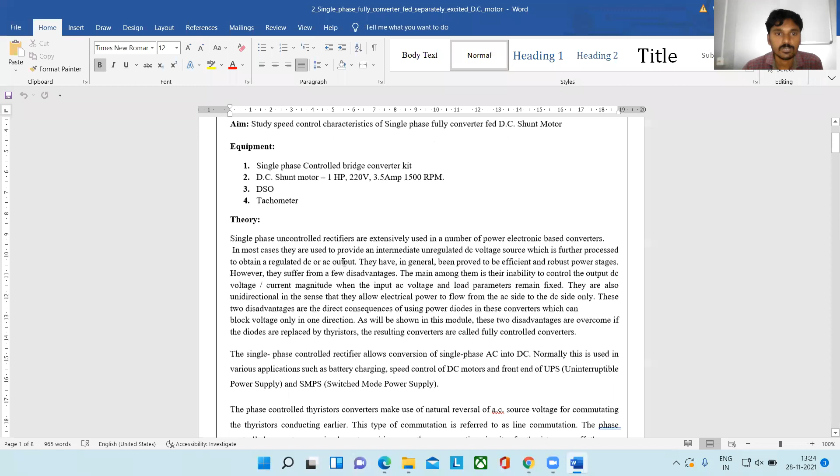Let us see here. Already we have seen experiment number 1, single phase fully controlled bridge rectifier fed DC motor, controlling its speed. So what are we going to do here? We are going to control the speed of this DC motor using a single phase semi-controlled converter, whereas that one was fully controlled converter.

Let us see here, let us start MATLAB. Directly we can design it. Open MATLAB by double clicking on the MATLAB icon. So by double clicking on the MATLAB icon, we get the main command window. This is the main command window. In this command window, type Simulink.

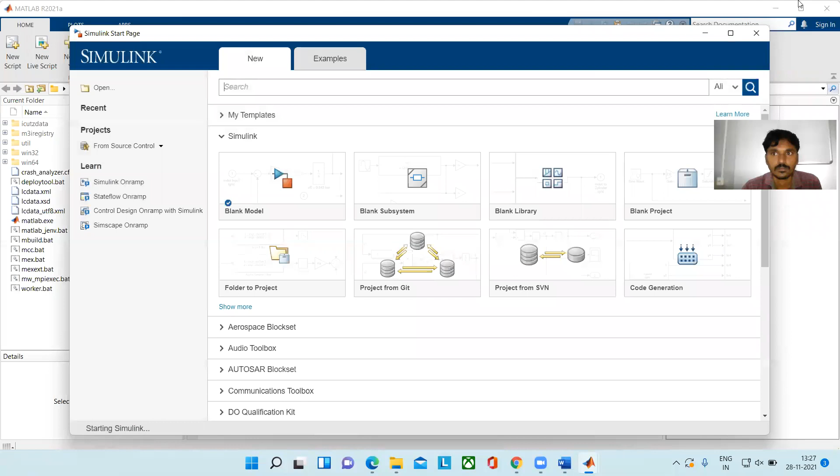So you will get this Simulink start page window. From this window we can take a blank model - create a blank model. Wait, it will take time.

Okay, we got this window - this is the Simulink window which we are going to design in. In this window, we are going to design the simulation circuit diagram. From this window you can see the Simulink library browser. The library browser is nothing but a collection of all elements.

You can see this Simulink library browser here. From this, you can see the commonly used blocks - bus creator, bus selector, constant. Whatever elements we require, we can drag from this Simulink library browser to this window. Next we can check the scopes - whatever waveforms you want to check, you can use a scope. Also sources.

So if you want to give the two inputs, for example, you can give the number 5. For example, this is the 4.

Okay, so let's check the output, whether we are getting the output or not. So run the simulation. You can see the run symbol here. By clicking on this run, the simulation will be run. You can see the waveform, whether we are getting it or not, I don't know.

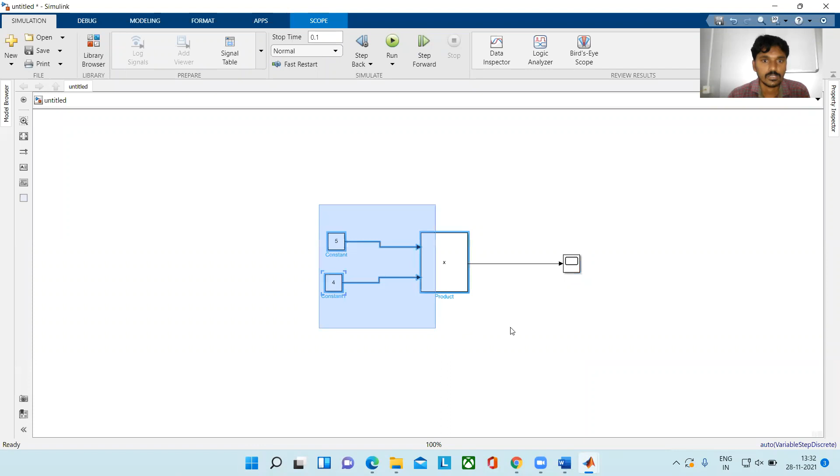Okay, so whatever, you can see the waveforms. I will design the single phase semi control converter directly, so no need to do all this. So see here, to design the single phase semi control converter, how many thyristors are required? For a semi control converter, we need 2 thyristors and 2 diodes. Is it right? So take this one.

So to get the thyristors, we can go through this SimScape. Okay, you can go for the SimScape. Click on this SimScape, and next go to the electrical. So which elements we required? Thyristors, na? So where we can get the thyristors? Where we can get the thyristors?

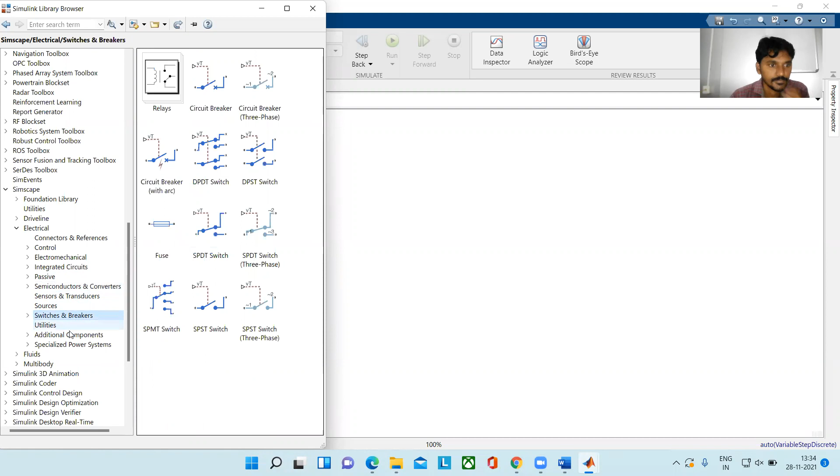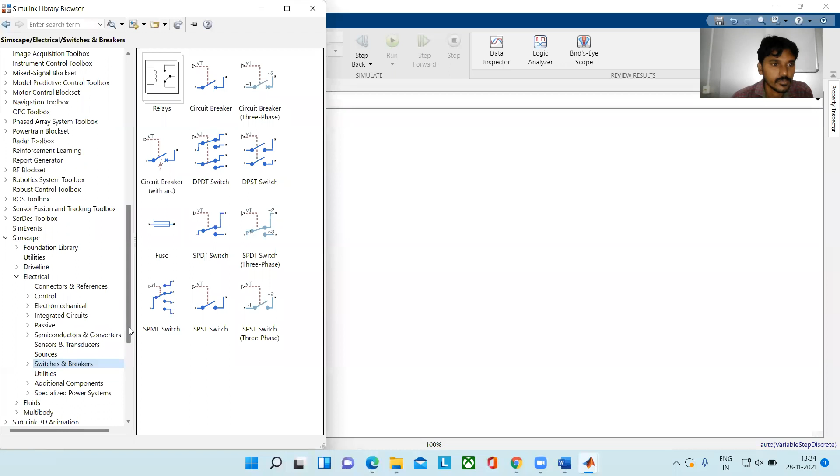Okay, you can see here semiconductor and converters. So from this SimScape, go to the power electronics, that is the semiconductors and converters. So from here we can get the diodes. Drag this diode.

Wait, it will take the time. Okay, so we got the diode, and which elements we required?

Thyristor we required. Okay, thyristor you can drag. And what are the elements we required here? We require the AC supply voltage. We require the AC supply voltage.

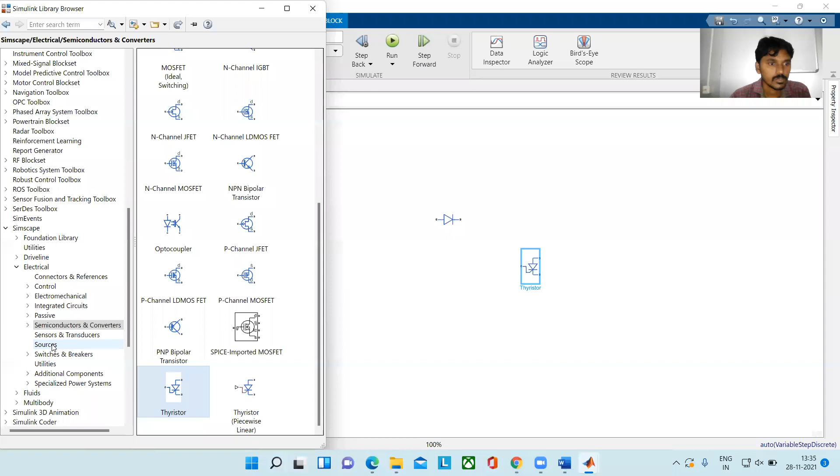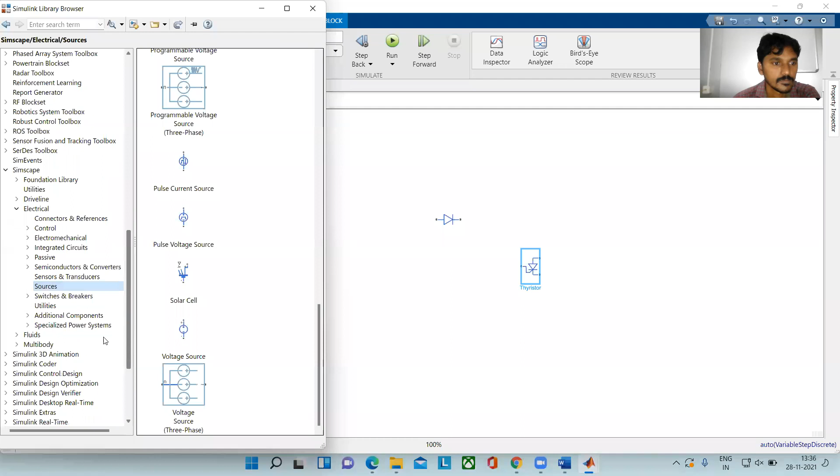So go to the sources. Okay, take this single phase AC supply.

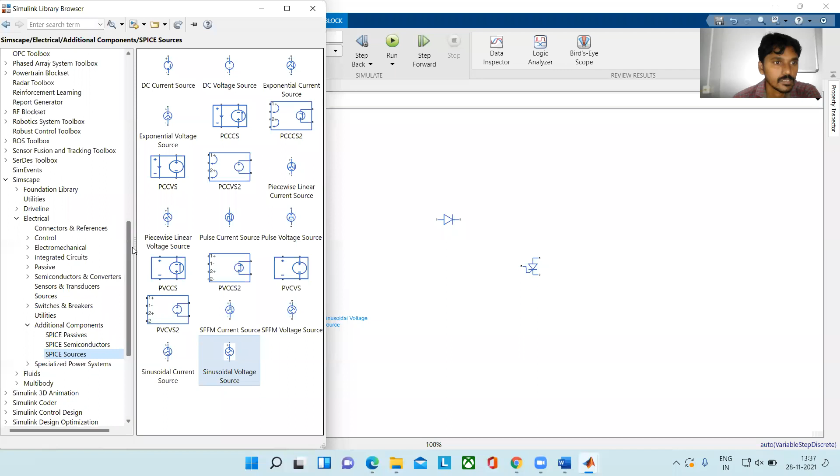And which elements we required? We require the motor. We require the motor. Where we can take the motors? Electromechanical. Check here.

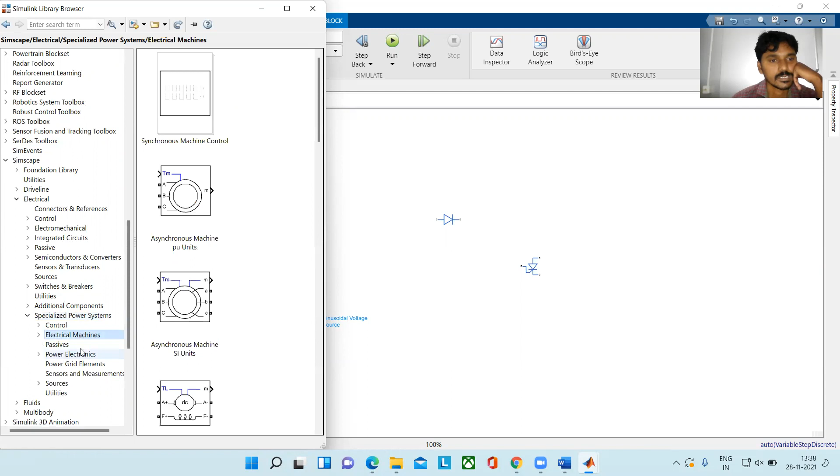So specialized power systems, go to the electrical machines. Okay. Specialized power systems, go to the electrical machines. So from here, all types of motors are available. So we need a DC machine. Okay, separately excited DC motor.

You can drag this one. You can drag this one. Clear. Also, you can take the power electronics from this also. So you can take the diode. Okay, so no need to take this diode. You can get the cancel.

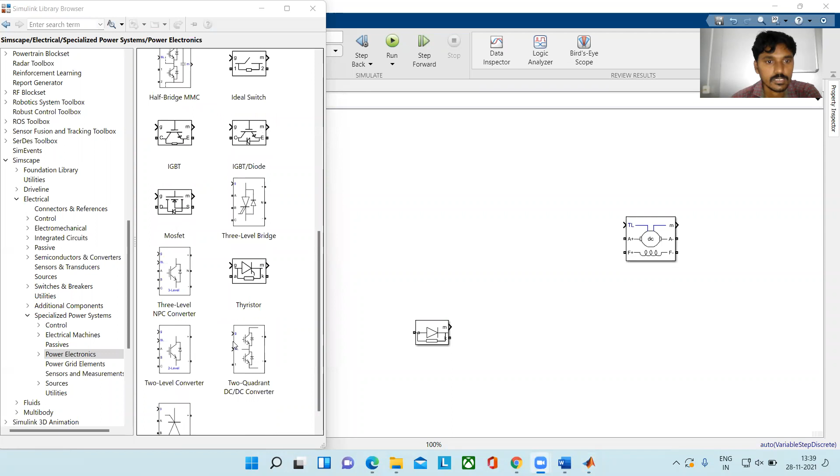So next we require the thyristors. So where is the thyristor? So thyristor is there here. You can drag this thyristor from the Simulink library browser to this window.

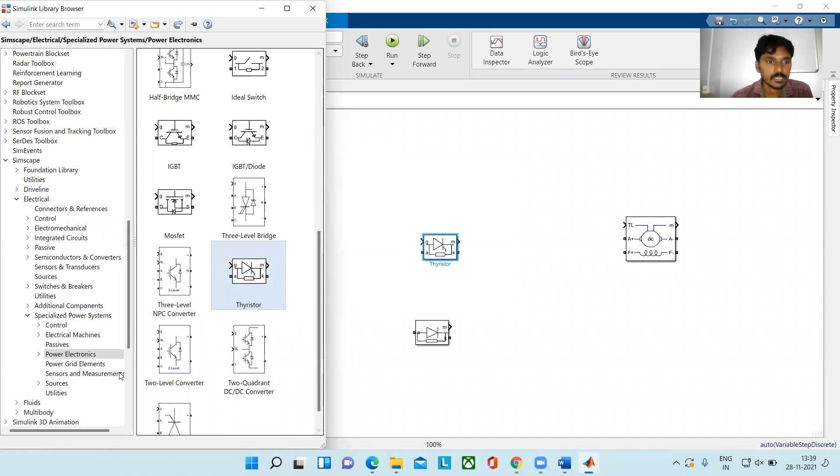Clear. And which we require to measure the output voltage. Okay, to measure the output voltage, we need one voltage measurement. So here you can go to the sensors and measurements. Okay, here from these measurements you can get the current. You can take the current measurement. Okay.

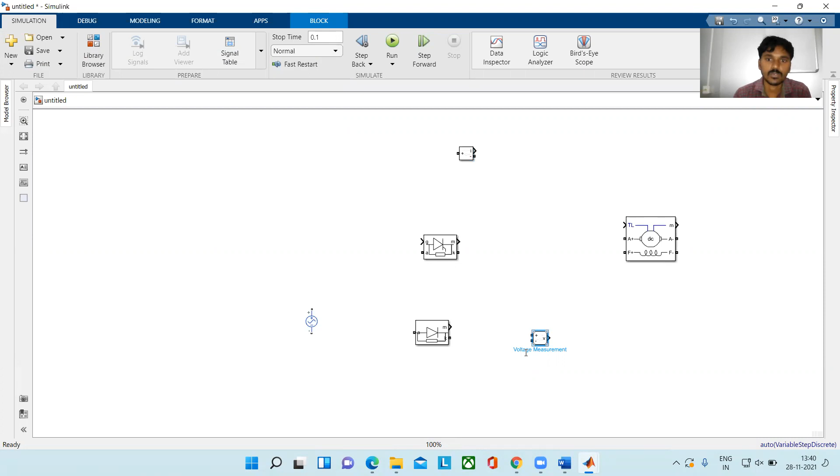Also you can take the voltage measurement. Here is the voltage measurement. This is the voltage measurement. So for measuring the voltage and current, we are taking the voltage measurement and current measurements. Clear. Or which elements we required? Let's see, design the diagram.

So to rotate the elements, press Control R. Okay, and then Control R, and then Control R. Screen is visible now, all of you?

Hello? Screen is visible?

Okay, so to rotate the device in simulation, press Control R. Okay, so this is Control R.

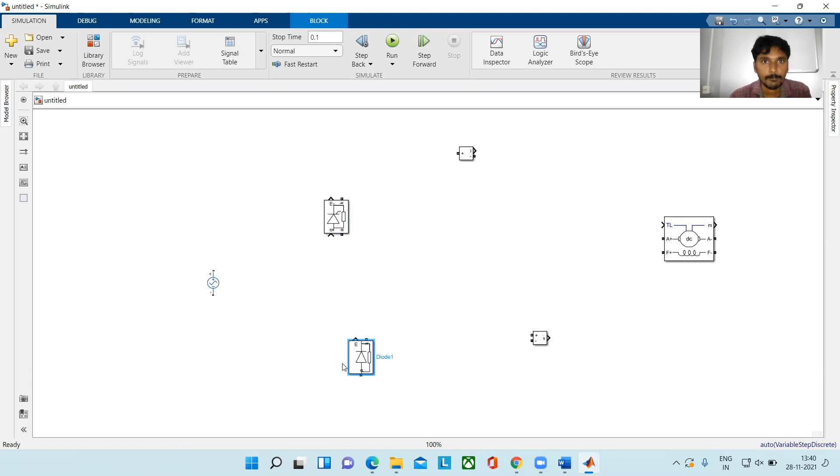So how many thyristors are we required here to design the single phase semi control converter? We require 2 thyristors and 2 diodes. 2 thyristors and 2 diodes we required.

So press on this element and press Control, and then you can drag this element. Clear? So if you want to take the number of elements, you can click on this element and press Control and drag this one like that. So however many elements you require, you can take them like that. Clear? So now we only require 2 thyristors. We require only 2 thyristors.

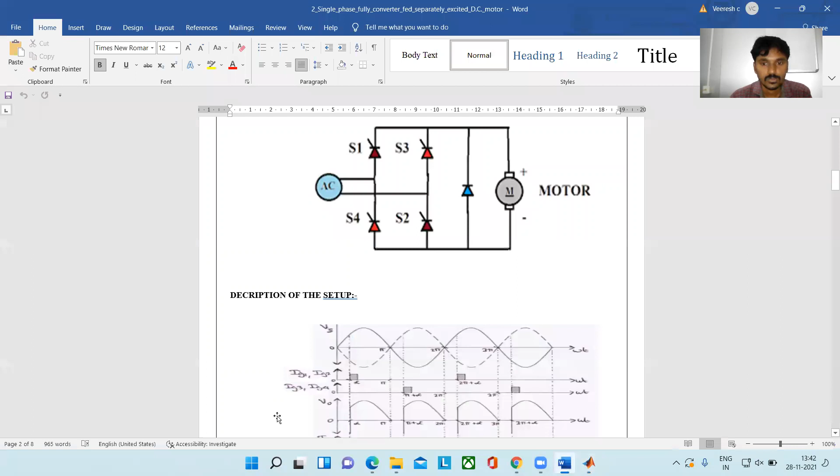Okay, so how the circuit diagram is going to be designed, I will show you. Just I will show the circuit diagram.

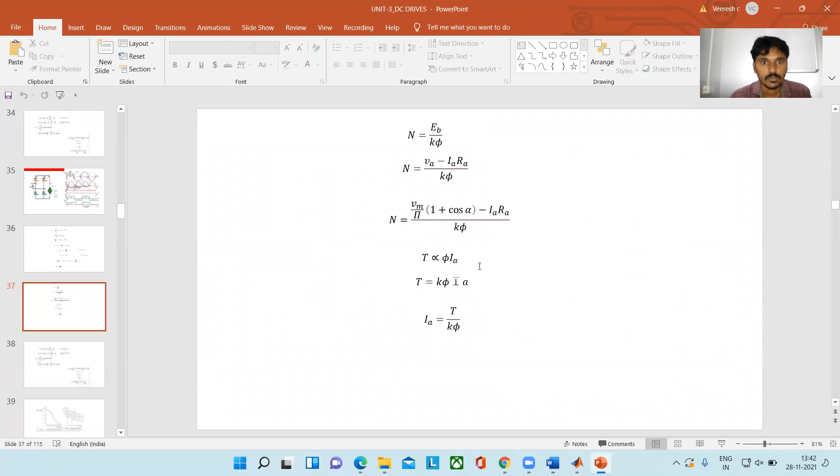This is the single phase semi-controlled converter, right? Yes or no?

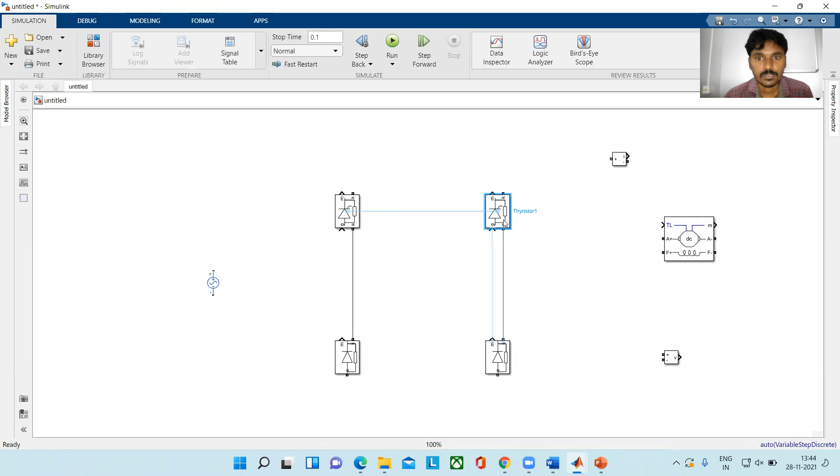The anode of this thyristor is going to connect to the cathode of this diode. So next, the cathode of this thyristor and cathode of this thyristor are connected common. Next, anode of this diode and anode of this diode are connected common.

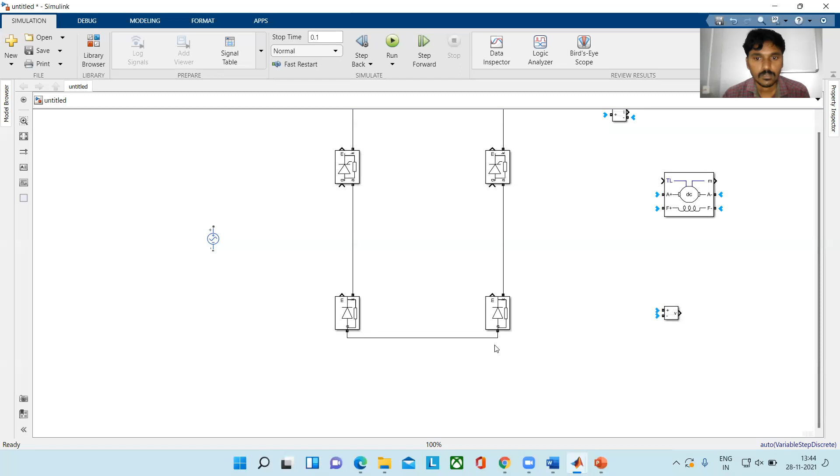Red mark means not connected. So when it connects, it will show as a black color.

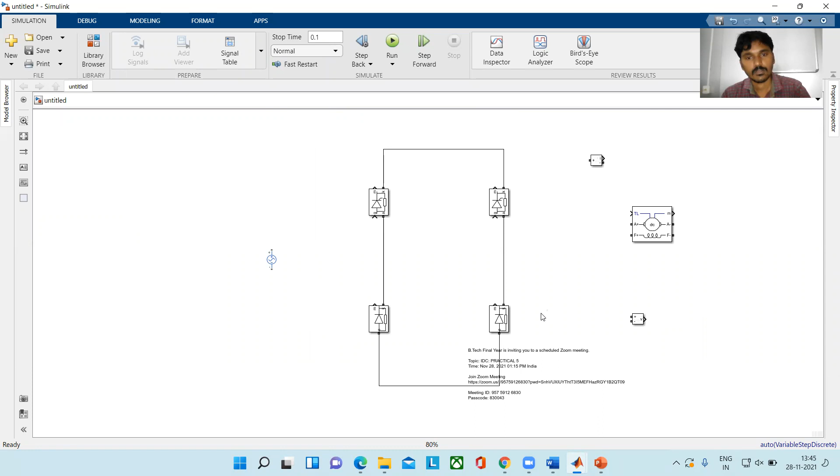Now we are going to connect the motor across this rectifier. This motor is having 4 terminals: armature terminals A, AA, and field terminals F and FF. Clear?

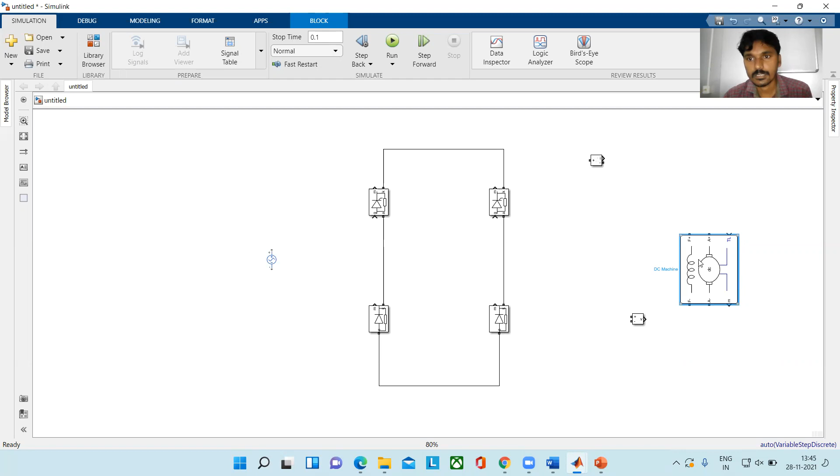So press Control R. You can show here like this. So also you can connect like this, Control R. So the A terminal is connected to this terminal, and the double A terminal, the second terminal of the DC armature of the DC motor, is connected to this one. Is it right?

But here to measure the current, we are going to take the current measurement. This current measurement is connected in series with the circuit always. Please remember, current measurement is always connected in series. If you want to measure the output current or armature current, this current measurement is connected in series with the circuit. Plus is connected like this and minus is connected to the armature. Now it is connected in series. Clear?

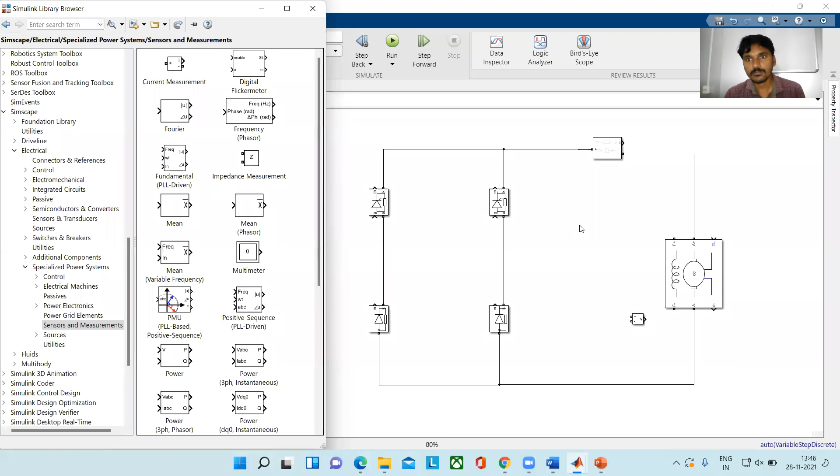Next, we require one more DC supply for exciting the field winding. So for that we are taking the DC supply. Where can we get the DC supply?

Go to the sources here. You can take the single phase AC voltage source here, but don't take this one. This is the single phase AC voltage source, and we require a DC voltage source. So from here, you can get the DC voltage source.

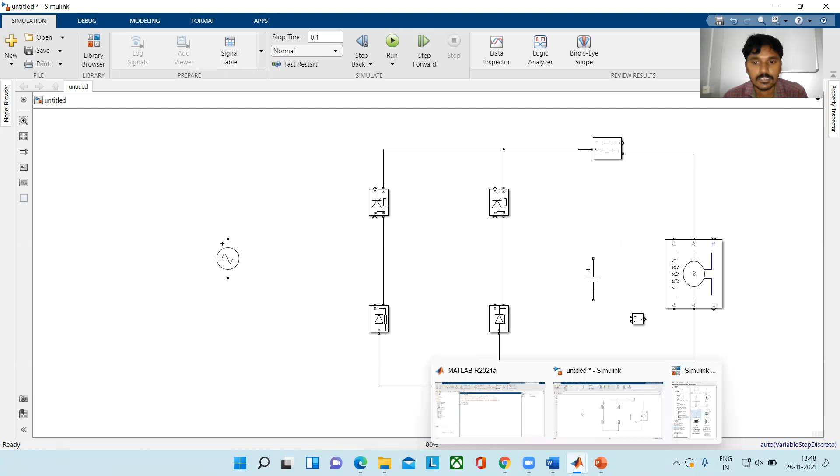AC. Okay, so here also we are going to connect the AC terminal. The positive terminal is connected at this place, at this terminal. And the second terminal, where is it connected? Directly at this point. So this second terminal is connected at this terminal. Clear? So this single phase AC supply is given as an input for this rectifier.

To excite the DC motor field winding, we are taking the DC supply, and this DC supply is given like this to the field winding. This is the DC supply given to the field winding of the DC motor. This means this is the separately excited DC motor, that's why the field winding is excited by a separate DC supply. For that purpose we have taken the separate DC supply.

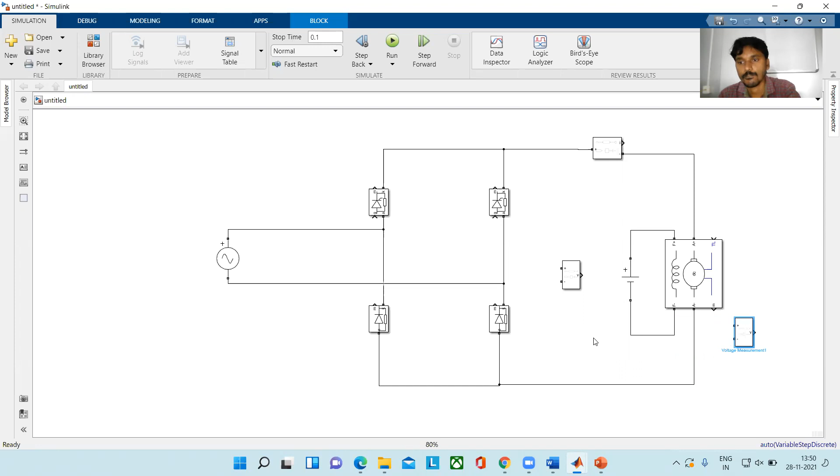Okay, we are taking one voltage measurement, and this voltage measurement is connected across the circuit. Is it clear? So these are the armature terminals. If you want to measure the armature terminal voltage, we can connect the voltage across the armature terminals.

If you want to connect the supply voltage, if you want to measure the supply voltage, take one more voltage measurement. Clear? So you can connect this across the supply voltage. You can connect the voltage measurement across the supply.

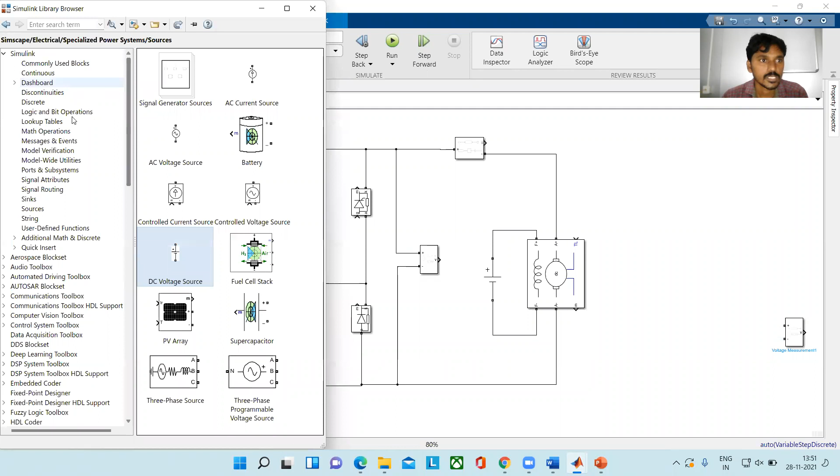So to check this waveform, we can take one scope. Scope is available at sinks, from the sinks at the top of the Simulink library, so you can get the sinks here. From this sink, you can take the scope here. Clear? So this scope is connected. This one.

Next, for measuring the speed and torque of the motor. So how we can measure the speed and torque? Here you can take one more terminal of this DC motor. Okay, you can see here.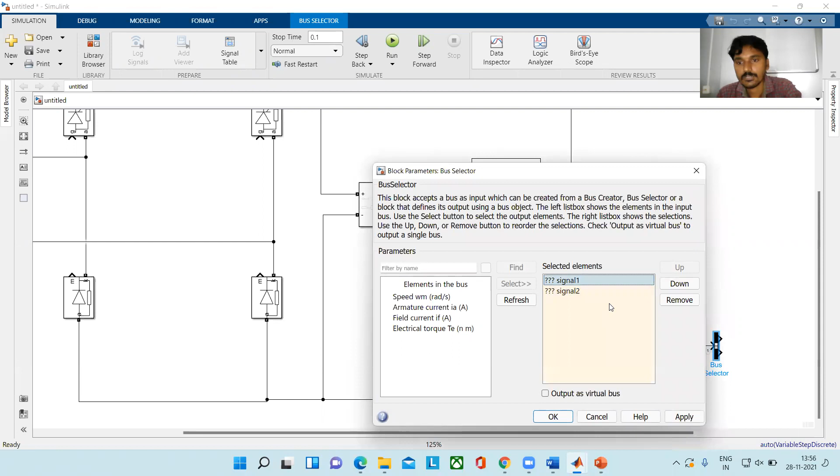Next, you can see here which parameters we have to check. So you can take any parameter. If you want to check the motor speed, select the speed and select on this one. Okay, the motor speed is selected. And if you want to check the torque, if you want to see the waveform of the torque, you can click on this torque and select. Okay, these parameters came. If you want to check the armature current also, you can check, no problem. Okay, or otherwise you can check the field current. Select field current, then click apply.

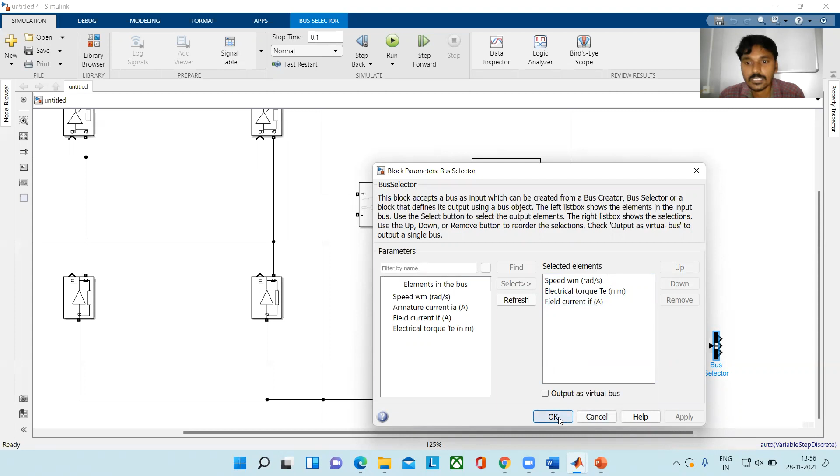Okay, so here how many parameters have we taken? Three parameters: motor speed, motor torque, and field current. We have taken three parameters, so that's why three terminals are displaying in this bus selector. Clear? This one is for motor speed. This is for the electrical torque. This is for the field current. Is it right? Is it okay?

Next, so to check the... just one minute, I will come. Just one minute.

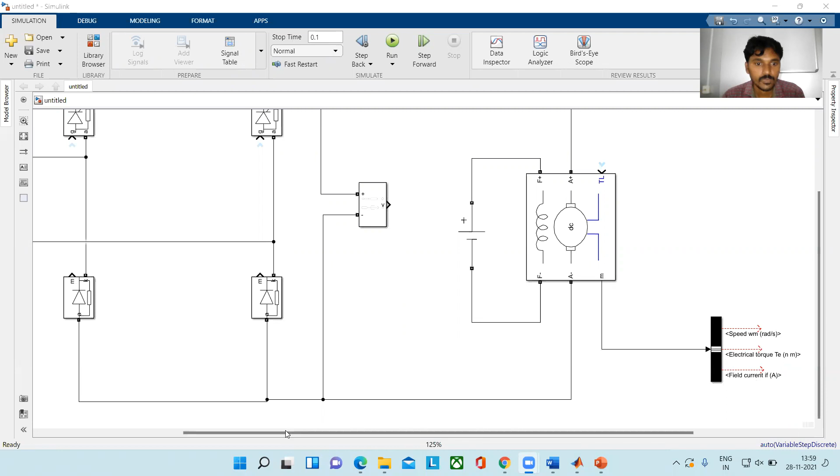In order to check the speed waveform, torque waveform, and current waveform, we need to take one scope. Click on the library browser, go to sinks, take the scope, and connect it.

If you want more space, you can arrange it like this to get more space. Take any block and place it so you get more space.

Take this and connect the motor speed to this waveform. And take one more scope, take this scope. Otherwise we can see 3 parameters in one waveform, no problem, but for better clarity, take different scopes.

Next, there is one more terminal provided here on the motor, that is the torque. So take one constant element here, take the constant element, and give it some value, put 1, no problem.

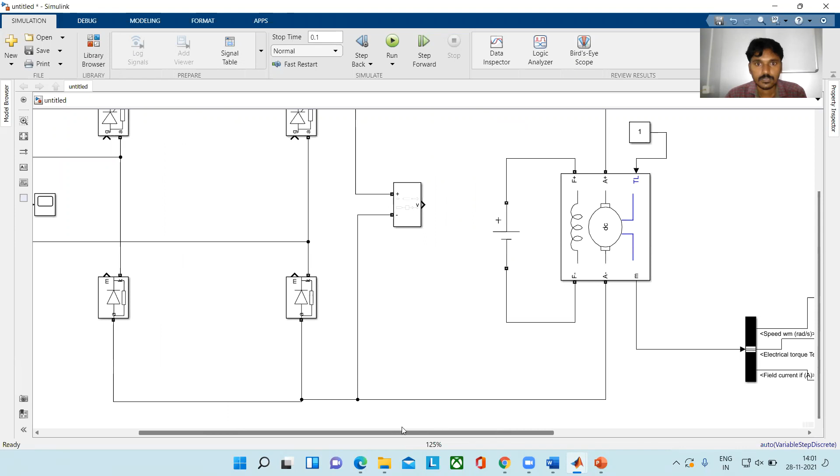This is the circuit we have designed, but to turn on the thyristors, we need gate pulses, right? To turn on the thyristors we require gate pulses. For giving the gate pulses for these thyristors, we are taking one pulse generator here. The pulse generator is available in commonly used blocks and sources.

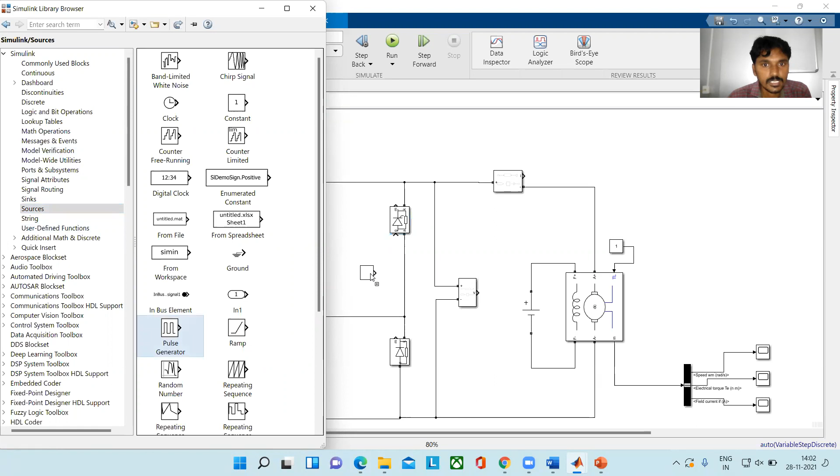Take this pulse generator. Connect this pulse generator to the gate circuit. Take one more pulse generator by clicking on this and pressing Control, then you can drag it. So you can create any number of elements this way.

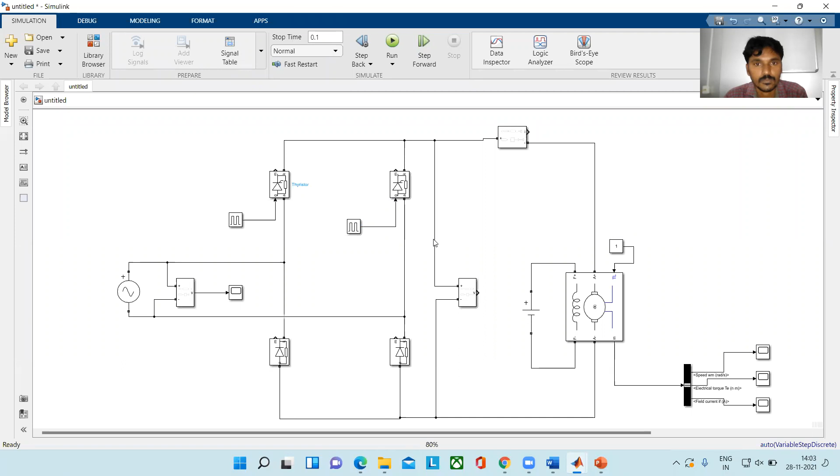Connect this gate terminal. You can see here, this is the anode, this is the cathode terminal of the thyristor, this is the anode terminal of this thyristor, and this is the gate terminal of these thyristors. So gate terminal, anode terminal, cathode terminal. This is the measurement terminal, meaning voltage across the thyristors and current through the thyristors.

If you want to measure, you can take the graph scope and connect it here, so you can check the voltage and current waveforms across the thyristors by connecting this terminal. We will see that later. So here we have taken the pulse generator.

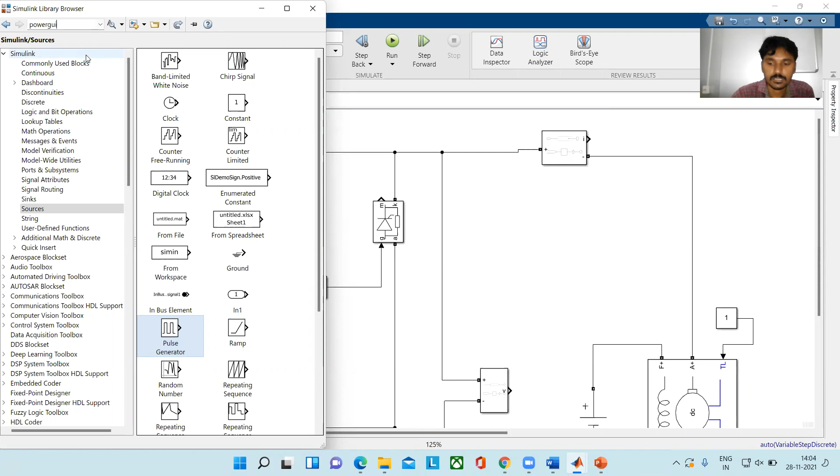To run this circuit, we need one powergui block because we are taking the supply here. Just type 'powergui' in the search item, so you can get this one. Take the powergui block.

Now you can run, but before running the simulation, connect the waveform scope for checking the output voltage waveform and output current waveform. You can take this one.

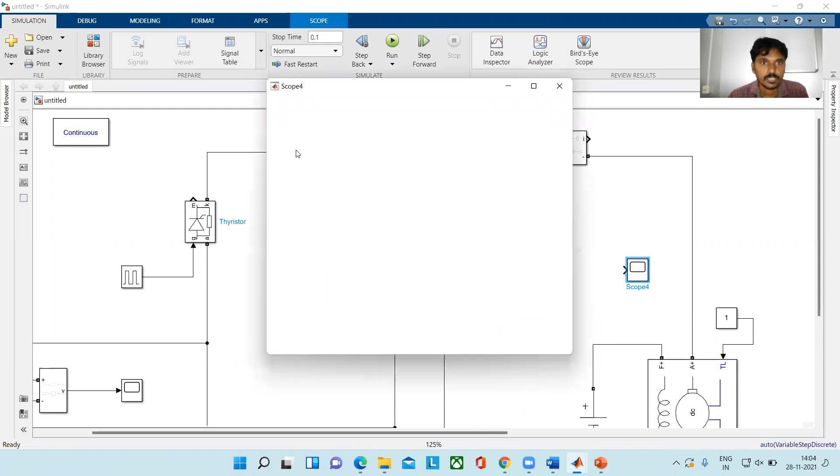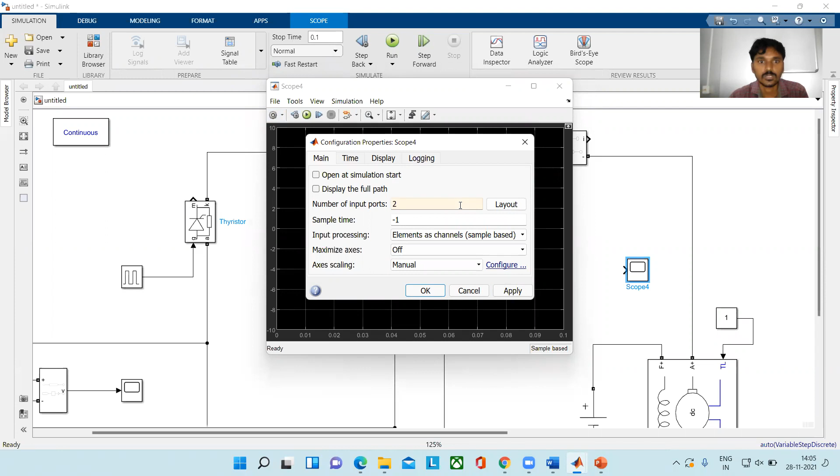Make the scope as 2. Double click on this scope, here you can see the setting symbol, that is the configuration property symbol. Click on this and go to number of input ports. If you want to check two waveforms, put 2; if you want three waveforms, put 3. Here we are going to check the output voltage and output current waveform, so only 2 parameters. Enter 2 for number of input ports, then okay.

So here you can see 2 terminals, this is the output voltage and this is the output current. Is it okay, all of you?

Now here you can see the run symbol. Just click on this run. There are no errors, the circuit diagram has run. You can see the waveforms by double clicking on this scope.

But is this waveform correct? No, this is not correct because we have not given any gate pulses here. We have just connected it but not given the parameters. You can see here, so how can we get the correct voltage waveform? We have to get the voltage waveform like this. For this purpose, it's better to take only one waveform, one scope.

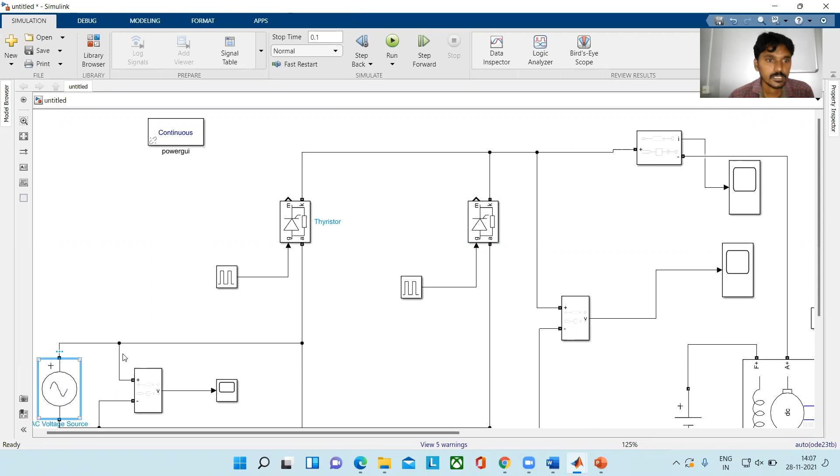So how can we set the values? Take the supply voltage, double click on this supply voltage. How much voltage do you want to give? For example, 230 volts, frequency 50 hertz.

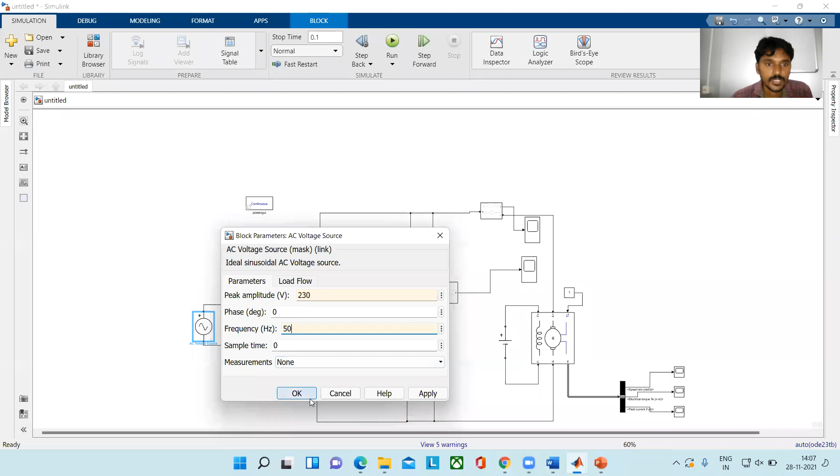So how much supply have we given for this circuit? For this single phase semi control converter, 230 volts, 50 hertz.

Next, so gate pulse, how can we check? Generally we have a formula to set the firing angle. Alpha is...

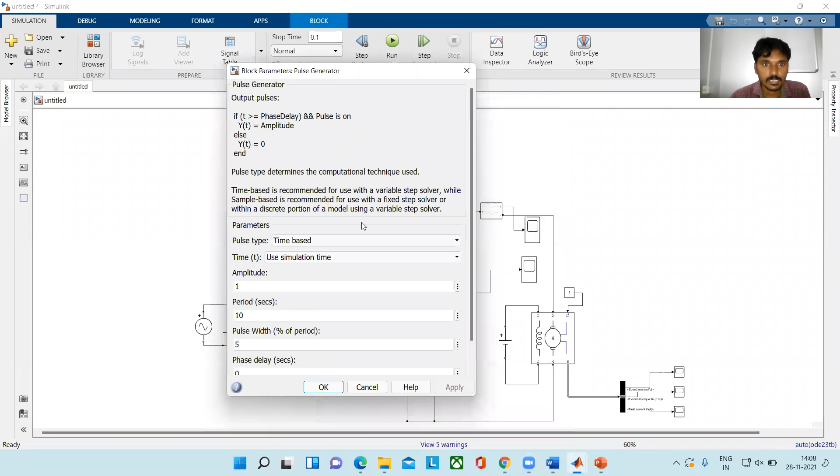Double click on this one, pulse generator. You can see these parameters: amplitude, time period, pulse width, phase delay. No need to change any values of the amplitude and pulse width. Just set the values of time period and phase delay.

This means when the thyristor is going to be turned on, that is the meaning of this one. So time period T, how can we set the time? We know the formula T is equal to 1 by F.

1 by frequency. Frequency, how much have we given as input? 50, right? 230 volts, 50 hertz we have given, right? 1 by 50. What is the value of 1 by 50? Can anyone tell me please?

0.02. Yes, okay. 1 by 50 is equal to 0.02. So the value of the time period is 0.02. So here you can set 0.02.

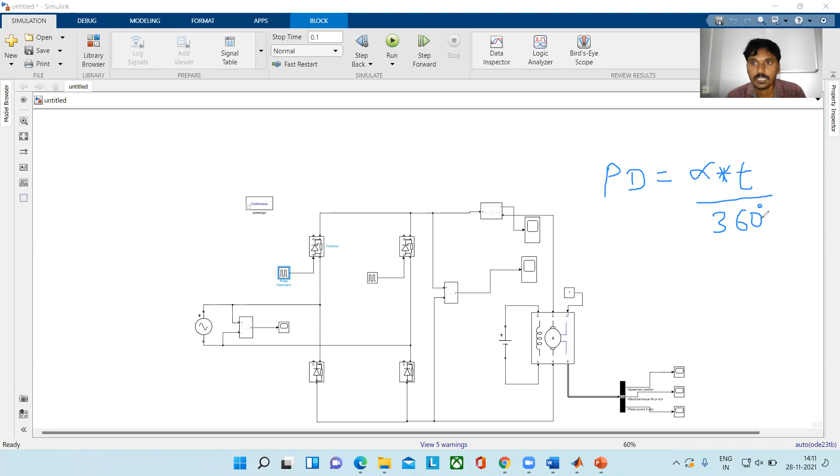So phase delay, PD, means phase delay is equal to alpha into T upon 360. Alpha into T upon 360 degrees. Why did we take 360? Because to complete one full cycle of the supply voltage, the time taken is 360 degrees. So for example, if you want to give the firing angle for the thyristors, alpha is equal to, for example, 45 degrees.

45 degrees. So phase delay, how much? PD is nothing but phase delay. So 45 into T, what is the value of time period? 1 by F, 1 by 50, 0.02, right? 45 into 0.02 divided by 360.

What is the value of this phase delay? 45 into 0.02 divided by 360. What is the value of this one? We need the exact value. 45 into 0.02 divided by 360, we need the exact value.

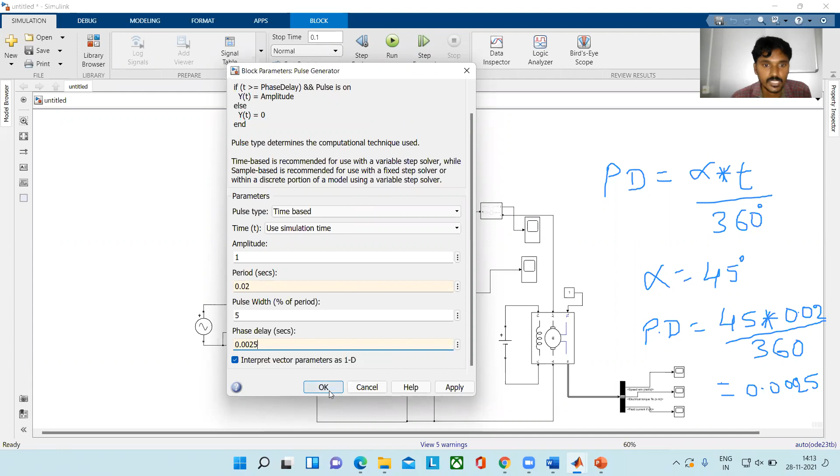Now you can put the value in this pulse generator. Phase delay is equal to 0.0025, meaning at time t equal to 0.0025 seconds the thyristor is going to be turned on. That is the meaning of this phase delay. So this is how we have given the parameters for these thyristors.

Next, we also have to turn on this second thyristor. So when this thyristor is going to be turned on, you can see from the waveforms that the second thyristor will be turned on at omega t equal to pi plus alpha, meaning 180 plus alpha. So the phase delay for the second thyristor has to change, because the first thyristor turns on at omega t equal to alpha, and this second thyristor will be turned on at omega t equal to pi plus alpha, that is 180 plus alpha. So that value has to change.

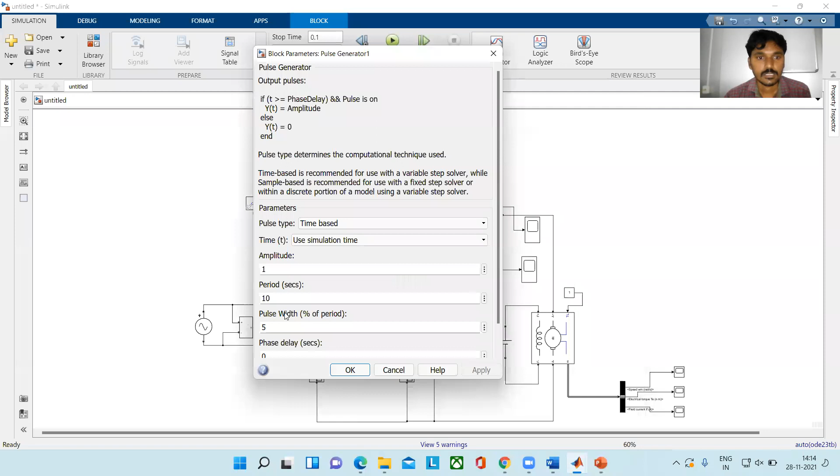Phase delay for the second thyristor: amplitude and pulse width need no change, just the time period. What is the value? Time period 0.02, that is 1 by 50, right? Yes sir, okay.

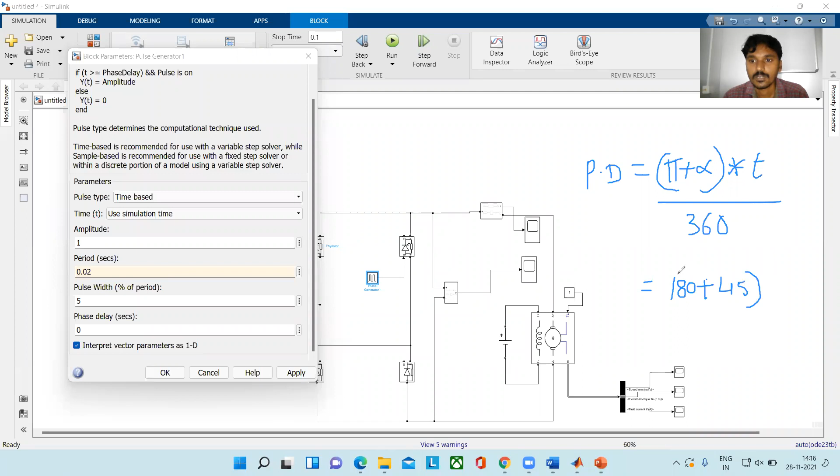180 plus 45 into 0.02, divided by 360 degrees. So what is the value of this one? 180 plus 45 is 225, into 0.02.

0.0125. Okay, the phase delay of this second thyristor is how much? 0.0125. So now you can put this value in the phase delay field as 0.0125.

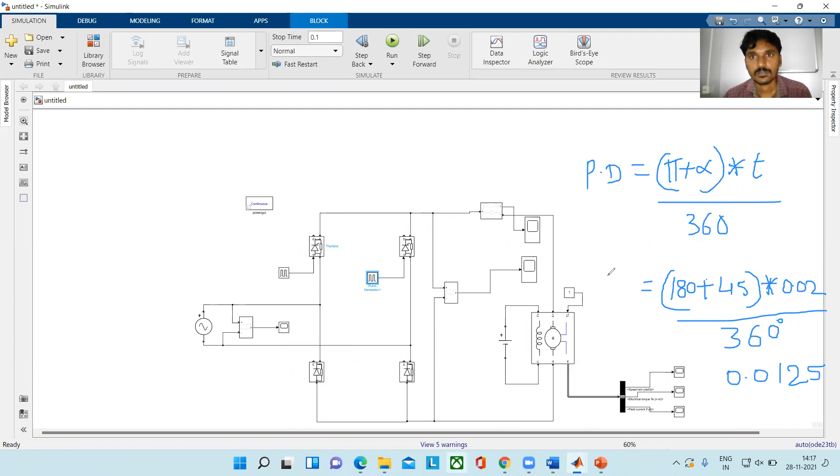Clear all drawings. So now we have given the parameters for when the thyristor will be turned on. So whatever changes you have made, we need to run the simulation, run the circuit diagram. Start the simulation.

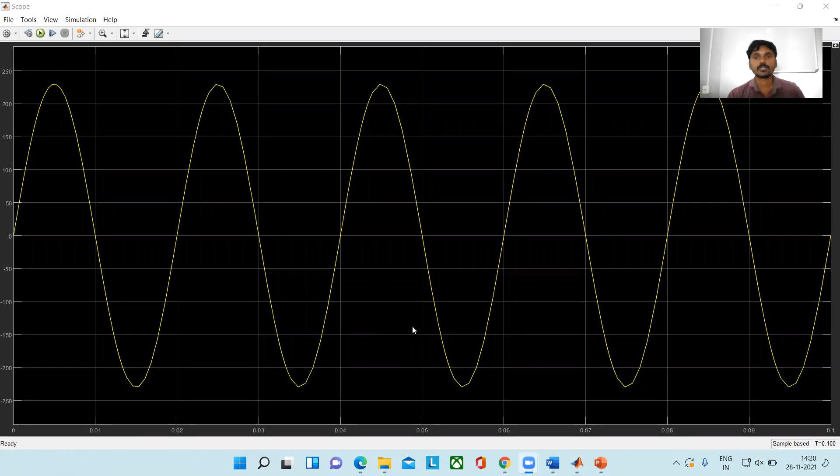Also you can check the supply current waveform. So how can you check the supply current? Just take this current measurement block and connect it in series with this circuit. Then by taking the scope you can check the supply current also, that is the input current waveform. Clear? So next,

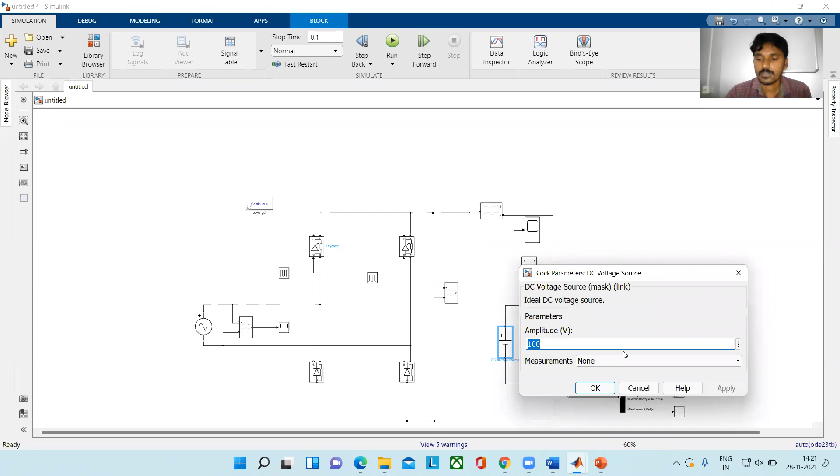give some voltage to the field circuit, 200 volts. The amplitude of this field voltage is 200 volts.

Okay, so armature terminal voltage input, what did we give? Circuit rectifier to 230, field circuit to 200. You can give 220 or 230 volts also, or 200 to 220 or 230 volts to this field winding, no problem. So again run this.

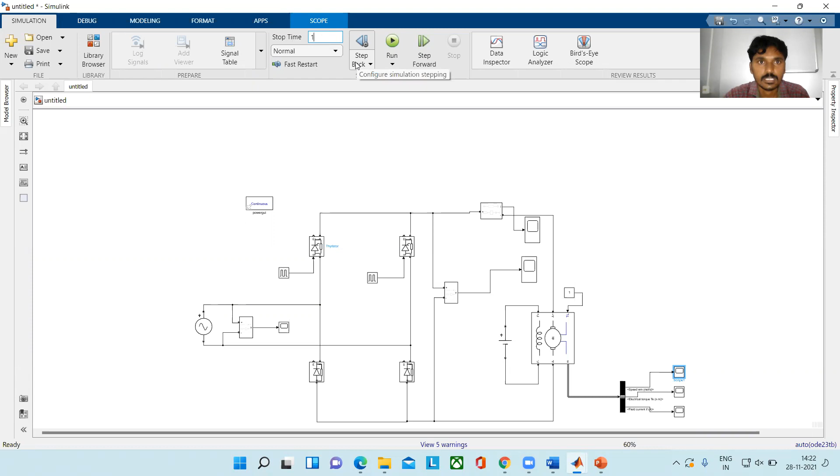Click on the speed of the motor. The speed is initially very low and it is going to increase, but it is going to increase linearly. If you want to check the waveform, you can increase the time value. For example, take 10 seconds. Start time 0, stop time 10 seconds. So again run this.

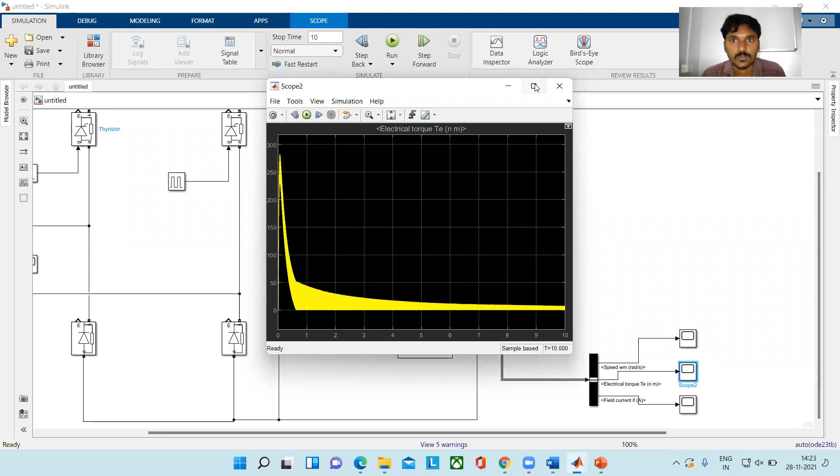Clear? Also you can check the motor torque. But the motor torque is getting like this. Initially it is increasing, then it is going to decrease.

Motor torque is in Newton meters. Initially it is 275 Newton meters, and then when the speed increases, the torque decreases. It will become linear, it is going to decrease. The speed increases, the torque decreases. It increases and then it decreases. So I think this is how we can see this waveform.

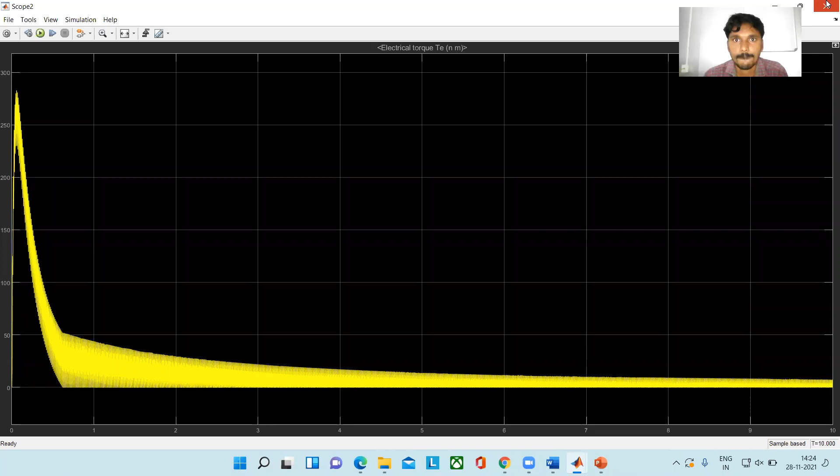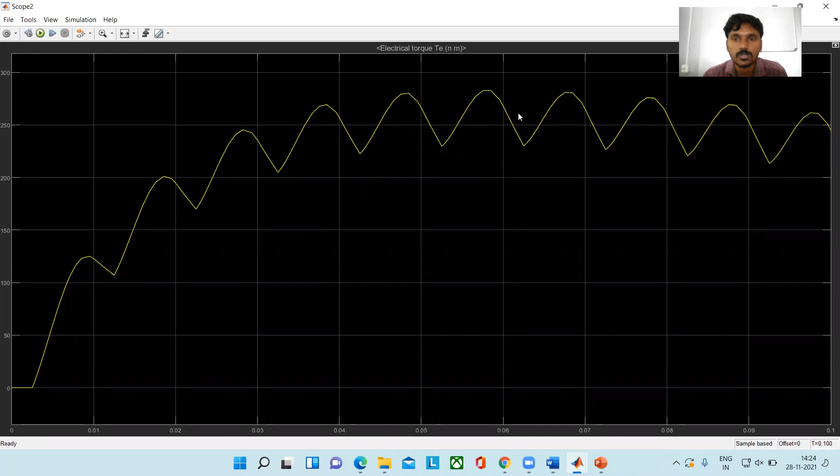If I change the time value, the electrical motor torque we are getting is like this. Motor torque means it is directly proportional to the armature current. Is it right? Motor torque and motor current are directly proportional.

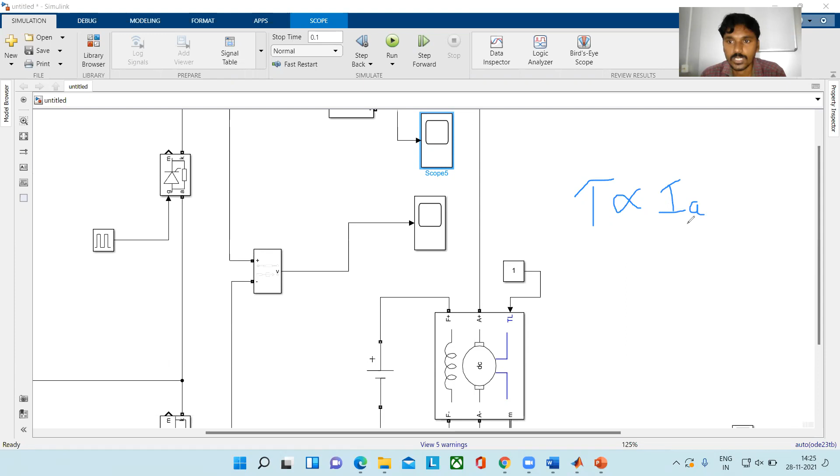So here you can see the motor current waveform also. Motor current waveform is also the same. Is it right? Both are same, because both are directly proportional. That's why the torque is always proportional to the armature current. Torque is always proportional to the armature current.

So whatever armature current waveform we are getting, the torque waveform is also the same. Clear? So you can see the armature current waveform like this. Next, motor torque waveform we are getting is the same one. This is the time we have taken, 0 to 0.1. Only a small time range on the x-axis, just to check the waveform from 0 to 0.1 seconds.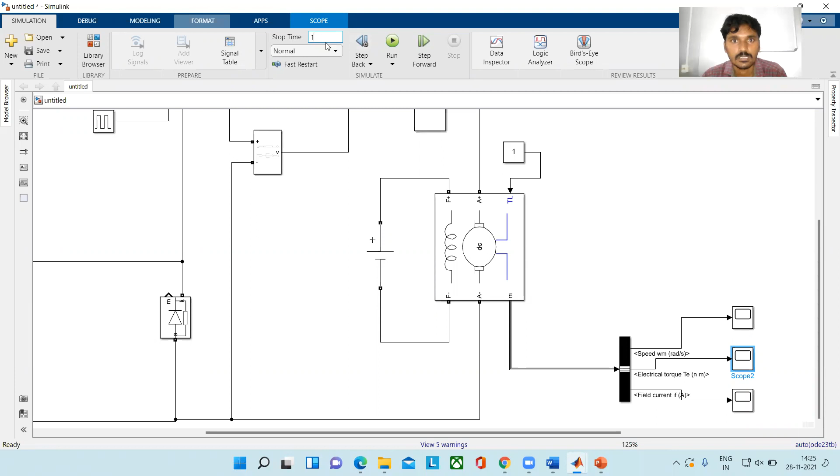If you want to increase the time, you can increase it. Check the waveform for 1 second. Stop time is 1 second. So you can see the torque waveform like this. Also you can see the armature current waveform.

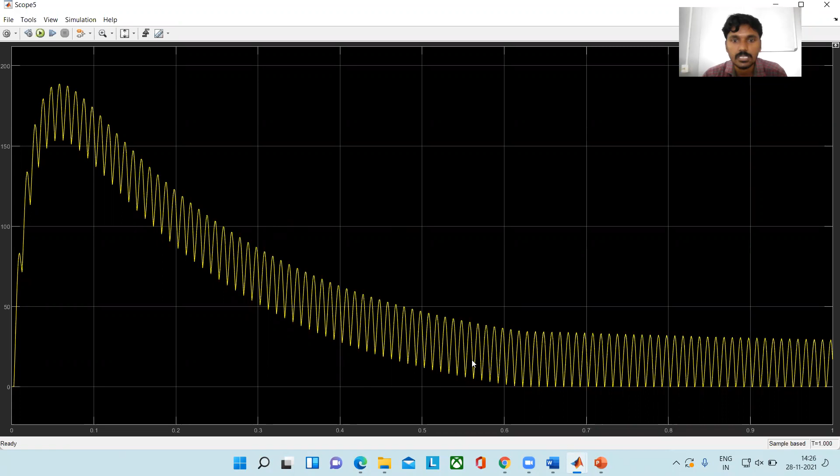So here, what we can say is theoretically we are saying the armature current and armature torque are directly proportional. Here also we are getting the same waveform for armature current and motor torque. Clear?

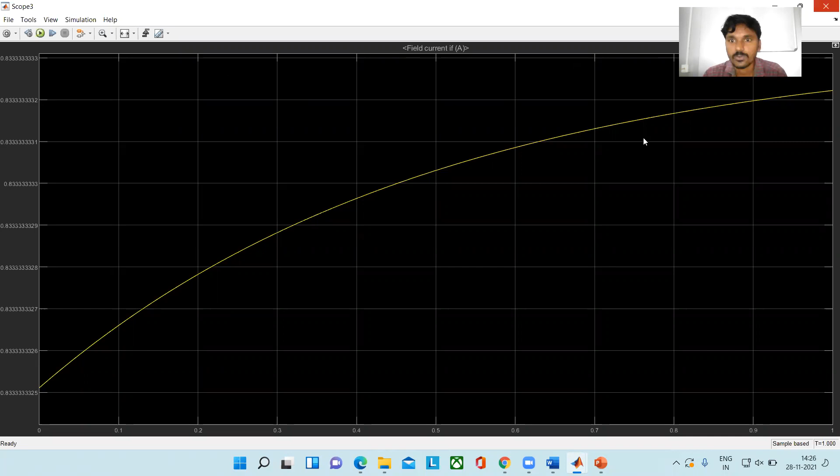Next, you can see the field current also. This is the field current, in amperes. A very small current is flowing, that is 0.8333 amperes. Very small amount of current is flowing through the field circuit.

So check this one more waveform. If we change any voltage firing angle, for example, these are the waveforms for 45 degrees. If you want to check 90 degrees, you can check that as well - phase delay. For example, phase delay equals, time period is 1/50. Phase delay is equal to 90 into 0.02 divided by 360.

What is the value of this one? Can anyone tell please? 90 into 0.02 divided by 360 - phase delay. Now I am going to check the waveforms for alpha equal to 90 degrees. Can anybody check and tell the value of this one? Phase delay alpha is equal to alpha into t upon 360, that is equal to 90 into 0.02 divided by 360. What is the value of this one? Please, can anyone tell? The answer is 0.005.

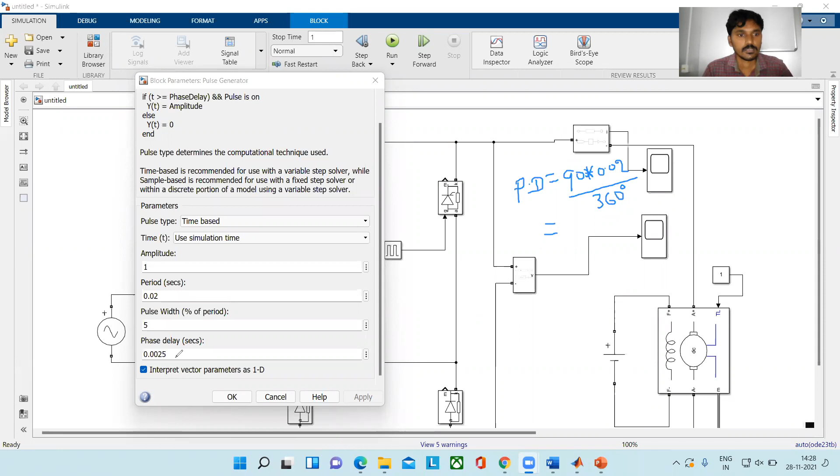0.005, yes sir. Okay, 5 into 10 to the power of minus 3. Yes, right answer. Let's see what will happen. 0.00, what is the value? 5. Okay, so next, this phase delay of the second thyristor also changes.

So what is the phase delay of the second thyristor? 180 plus alpha, 180 plus 90, into 0.02 divided by 360. 180 plus 90 into 0.02 divided by 360.

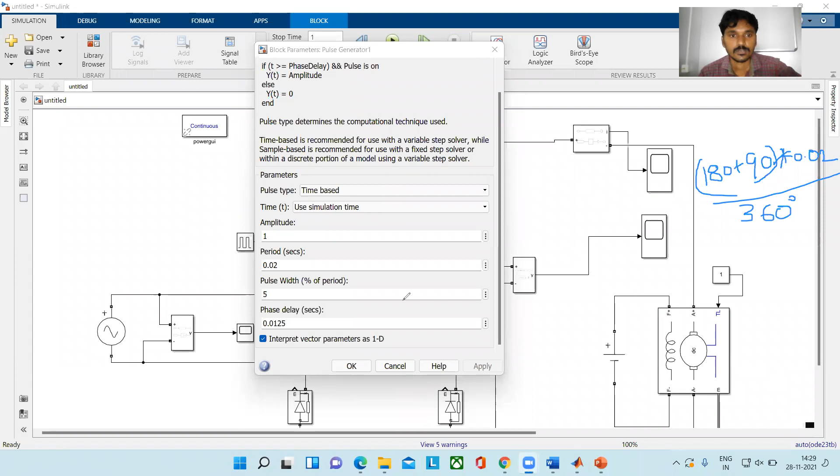Can you tell the value of this one? 0.015. Yes, right answer. 0.015, is it right? Okay, now the firing angle changes.

So is there any change in the output voltage waveform that we have to check? Because theoretically we are saying if the firing angle changes, the output voltage changes. If the output voltage changes, the speed also changes. So practically we have to prove that one.

So run this simulation, check the output voltage waveform. Put the value, time is 0.1, so we can easily and clearly visualize the waveform. Clear? 0.1, 0 to 0.1.

Is it right? Is the output voltage waveform correct? Exactly around 90 degrees it turned on. Yes sir, clear? This is T1, T2. Next.

This is the waveform, output voltage waveform when T1 is turned on. This is the output voltage waveform when T2 is turned on. So like this way, T1, T2. Clear? So the waveform is correct, output voltage waveform.

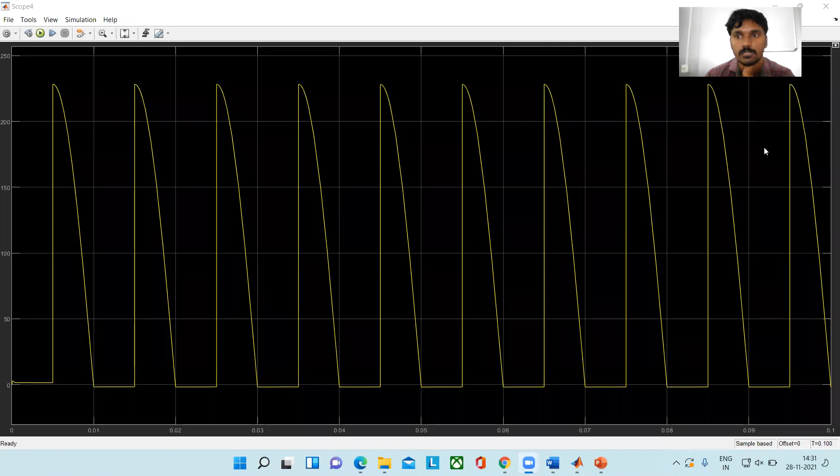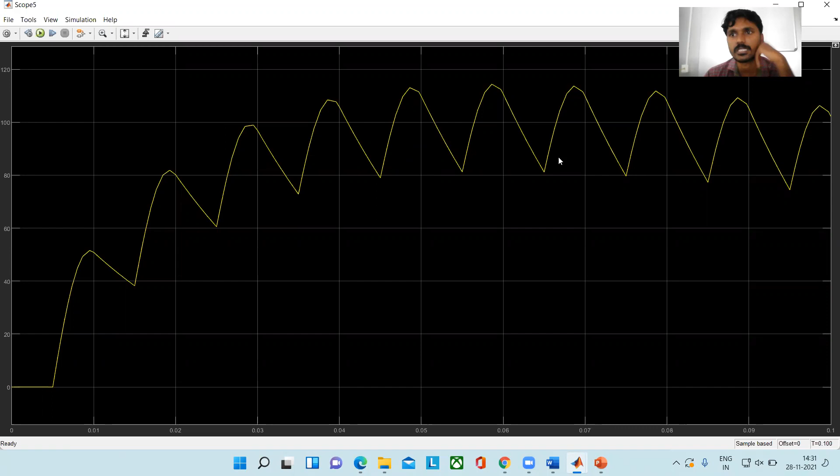So any changes in the output current? Okay, the magnitude of this output current changes. Only a little bit changes in the current waveform because we are not changing the load circuit. This current depends upon the load.

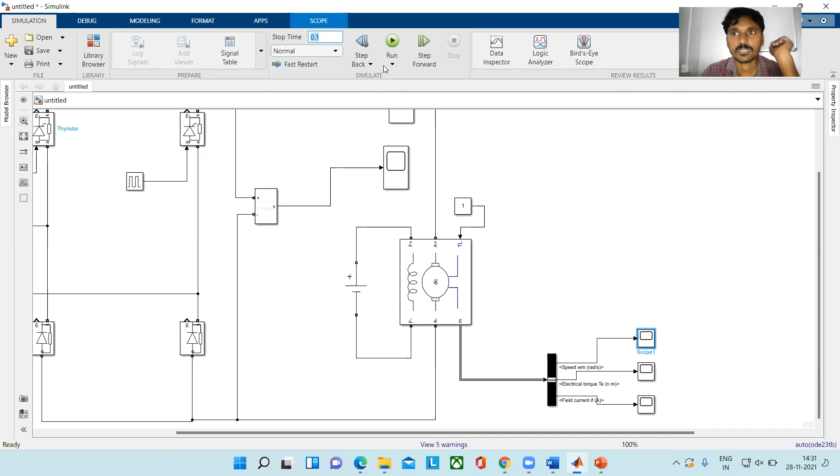So increase the time on x-axis because it's clearly not visible in small time. Take 1 second and run the simulation. Okay, so here you can see what is the speed of this motor.

What is the speed of this motor? 60 radians per second. This is the 50, and with small values increasing, that is 60 radians per second. Okay, approximately 55 radians per second. Is it right?

So when the firing angle is 45 degrees, what is the speed of the motor? How much was it? Do you remember? I think 150 or 135 radians per second. So now I can check again.

Okay, the speed of the DC motor is 55 radians per second. The speed of the DC motor is 55 radians per second. This means the firing angle is increased. The speed decreases, the speed decreases.

Is it right? When the firing angle is equal to 90 degrees, the speed is 55 radians per second. Is it right? So when the firing angle alpha is equal to 90 degrees, for 45 degrees previous case,

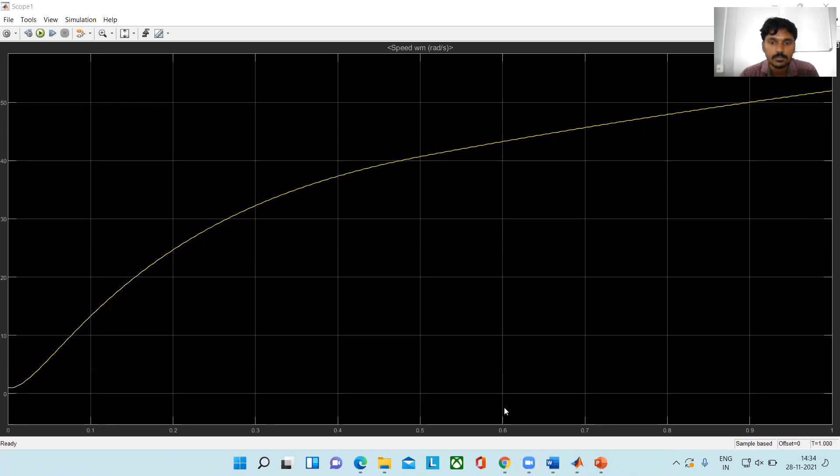Practically we have proved it, yes or no? Clear? So this is the

simple practical of the single phase semi-controlled converter fed separately excited DC motor. This means the speed control of separately excited DC motor using the single phase semi-controlled converter, that is the half controlled converter.